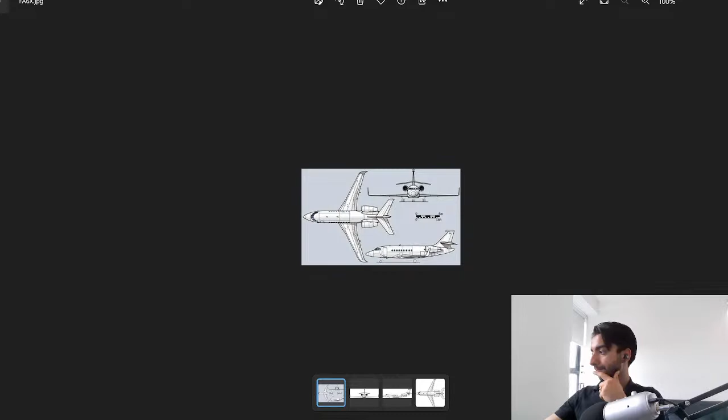Let me just show you what I've prepared so far. The original blueprints look like this, and as you can see, even on my screen it's coming up as a very small picture, so you can imagine what happens when I zoom it in. You can already start to see a lot of blurriness around these lines, and that's not really a problem, but when you put this inside of Fusion, the canvas is going to be somewhat translucent. Even though the picture itself is quite detailed, because the resolution is so low, we are going to struggle a bit. But that's okay.

That's actually why I took these as a challenge. My alternative was to make the Dassault 7X instead, which even had dimensions in the blueprints. That's my backup - in case the blueprints don't match up with the physical dimensions I find online, we'll go ahead and make the slightly bigger version of this aircraft, the Dassault 7X.

I can show you the blueprints I've prepared as well. So that's going to be this one - as you can see, again this is very, very small. If I zoom in, you can see where I've manually cropped this out and put it in place, but the quality is not very good. Next one is the side view - similar situation. And then we have the top view - similar situation.

Now, I have made a similar aircraft in the past, but that was with very nice blueprints - I think it was the Gulfstream. You can actually see that aircraft featured in my videos a lot, in my wallpapers and stuff.

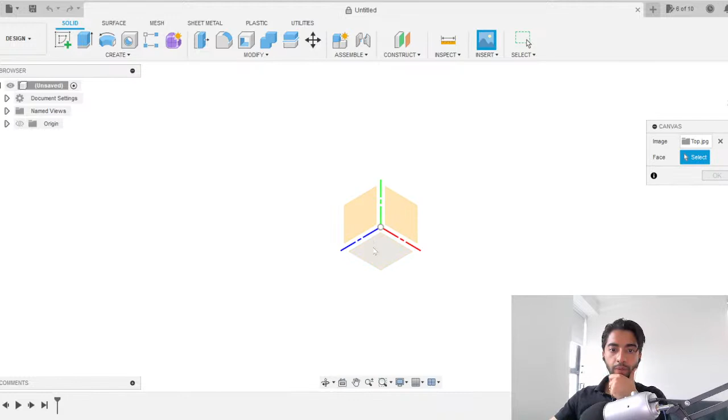Okay, let's take this here - the top view from the top section of Fusion. It seems like it's in the other way, so I'm going to rotate it 180 degrees, and I'm just going to scale it in an arbitrary fashion for the moment.

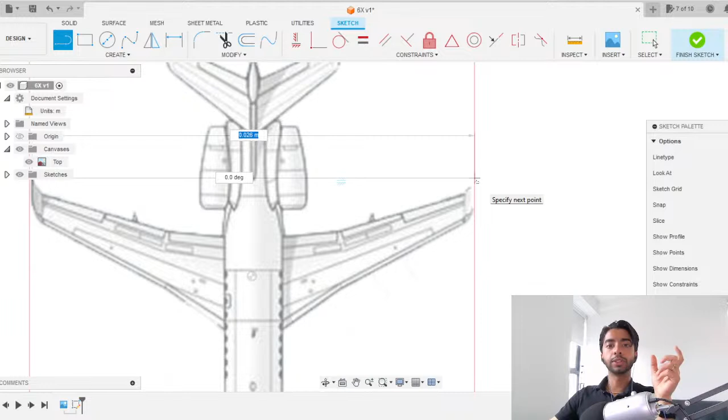And now it's gone down. But let's go to document settings, units, convert that to meters. Now you'll notice it would have converted it. So now hopefully from here to here it would be 25.94 meters. No, it isn't. Okay, so after converting it, you can tell it's converted into meters according to what its millimeter equivalent was. So let's try to scale this up again.

So calibrate from that point to that point, and now this is going to be 2594. So this is going to explode by approximately 1,000 times, because 1,000 millimeters is 1 meter. So 1, 2, 3, go. There we go, it explodes, yep - now that should be in its correct scale. So let's just go ahead and delete that - we don't need that sketch anymore.

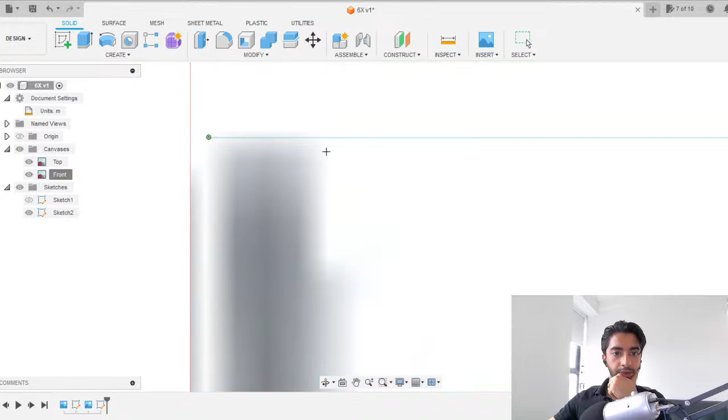We're going again. Paste the same number, and there we go. So as you can see, that's very, very nice. So the top blueprint and the front blueprint are very, very close.

The reason why I'm also happy to take this risk with the blueprints being of such low quality is because remembering the agenda of making this particular aircraft is to 3D print it. So if some of the measurements are a little bit off, I'm more than happy with that, as long as the aircraft ends up looking like the aircraft we're designing.

What will be interesting to see is the aircraft that some of you have recommended, like the FW190D, the Shrike Commander 500S, the F-20 Tiger Shark. Those would be interesting to see, because I don't know if I want to 3D print them, but I'm going to try and put some more effort in those lives to make it as accurate as I can.

In fact, I did work with a gentleman in the United States Air Force who had requested a very particular aircraft from me, which was operating in the 1920s or 30s, and I had to make that to a very high accuracy. So that took me about 20 to 25 hours to make.

Obviously, doing all of that at once in a YouTube live will be difficult, but it'll be interesting to see. And who knows, maybe one day I'll go live for like 48 hours and design the most accurate aircraft I have ever designed, which would be fun.

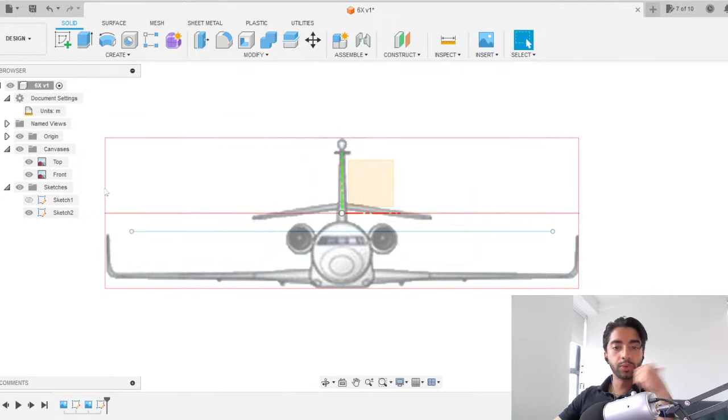Okay, so because we're now in the correct scale, I now want to position the front view correctly as well. So what I'll do is take the nose section as the middle point of the origin. The reason is because in this blueprint, we don't have the wheels.

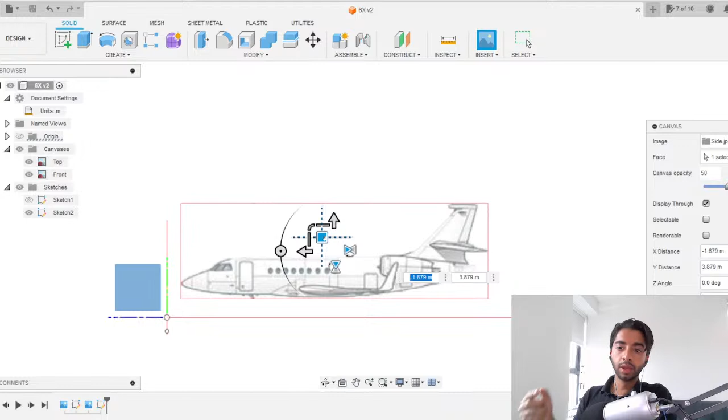So here's an approximate thing. And what I like to do is I like to not try to scale it to its perfect scale right away. I try to make it a little bit smaller than what I'm actually expecting it to be. And then when I calibrate it properly, I hope that everything will just fall into place. So I think I'm happy with the scale for now.

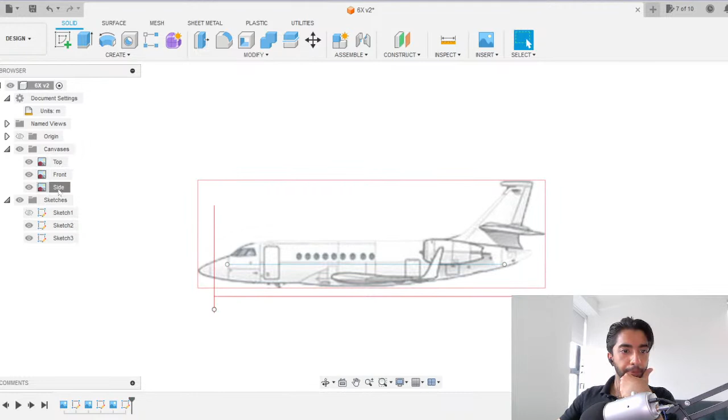And now we're going to position it. And now we can see whether or not that was the correct assumption. So remembering that we decided that the tip of the nose is going to be the center of our origin. So just about there. And now going back, we can see it actually aligns pretty well. I'm kind of surprised. So if we look at it from this view, we can see that when the tip of the nose aligns, then also very, very closely, I think there's just a little gentle nudge there that we might need to do, it aligns with the back. There's another way to verify this, and that is to do the front and the right view, so we can see whether the top of the fuselage, the cylindrical section, aligns well with this or not.

And I think it might be a good idea to scale up the right view just a little bit for them to meet. And that way we can also check then if the height of the fuselage itself matches with the height of the fuselage in the front section. Because remember, the front section was calibrated according to the wingspan of the aircraft. Okay, so I'm just going to edit the canvas. Okay, no, we don't need to calibrate it. We just need to edit the canvas.

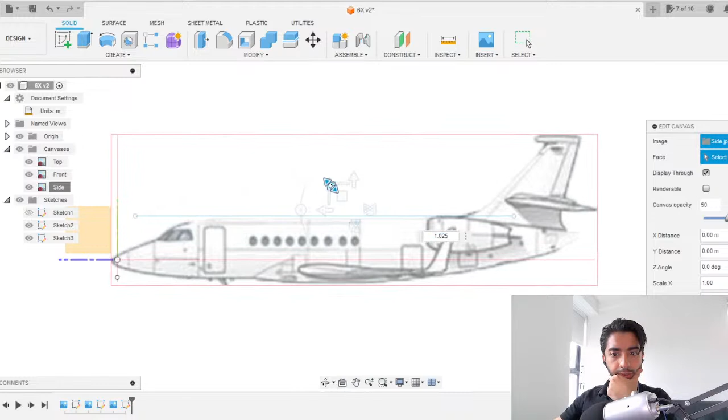There we go. And I will just increase it very slightly. That's too much. So 1.025 is 2.5%. We don't need to do 2.5. Let's do 2%. Nope, let's do 1%. Even 1% is too much. So really, it's a very small amount that we need to do. So 0.5%. And let's try aligning it there. Now you can see the back of the aircraft. The red lines you can see actually match really well, as well as the fronts. But again, we just got to make sure.

So let's remove the origin. And now let's do the top and right view. So now you can see that the tip of the horizontal stabilizer from the side view matches up with the tip of the horizontal stabilizer from the top view. Very, very nice. It's a very satisfying feeling when you just put in a little bit of extra work making sure these things match up. Okay, and now we can also see that the top of the fuselage from the front view is now very closely aligning to the top of the fuselage for the side view, and vice versa for the bottom. And another check I'd like to do is for the wingspan, so front view and top view.

Cool. So I'm happy with that, and it seems like our assumptions were right. So we did the length of the aircraft from the fuselage to the fuselage. Now, one thing I'd like to verify just to be completely sure is the height of the aircraft, which is 7.47. Now, the way I can do that is, let me just start from the side view. So I'm going to go from here, and really I don't need to even draw this line. It's more of just a reference. So let's go ahead and do 7.47.

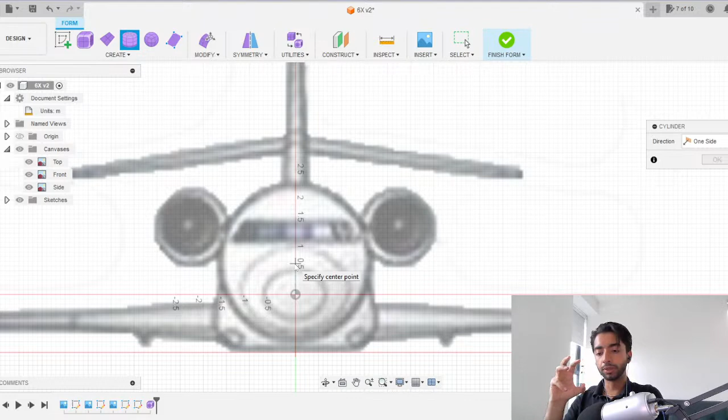So now we can go ahead and get started. Going to go to create form, cylinder, front face. And again, try and approximate where the center of your cylinder would be. So for those of you who are new, the fuselage of an aircraft usually is quite cylindrical in nature, so it might not be a perfect circle, but it is of a circular nature. So what we tend to do is we create a circular cross-section to begin with, and then we maneuver at every section or every segment along the fuselage to adapt to the actual shape of that aircraft.

So I'm just currently looking at an approximate location, which could potentially be the center of the circle I create. So that's that. There we go. And again, similar to the A330 series, we have to decide whether we want to take the outer border as truth or the inner border as truth. And I tend to go with the outer border, so I might do that right now.

Okay, so that's good. And let's go to the side view. That looks good as well. Again, we do want symmetry in this case. So I'm going to select symmetry and I'm going to do length symmetry. No, that's not the one. Width symmetry. So that's the one, of course. So as you can see, the green lines that have been highlighted are where your plane of symmetry is going to be. Okay, so I'm going to go ahead and press OK.

I'm just going to pull this entire thing back. And you can see that because our blueprints were well aligned, approximately this already matches the side view of the fuselage. We just have to scale it down ever so slightly, which is very, very okay to do. So I'm going to go ahead and press OK and save.

Again, front view, you can see that even though I selected that as the top, this is coming down a little bit. So we have to move the entire thing a little bit up. And let's see how this reacts. Okay, and now what I want to do is start scaling this down. So I'm going to remove these sections and I'm just going to start with a single slice. So we take that, right click, edit form, and now this becomes completely maneuverable to our control. So I'm going to scale this down just slightly so it matches, and I'm going to press OK.

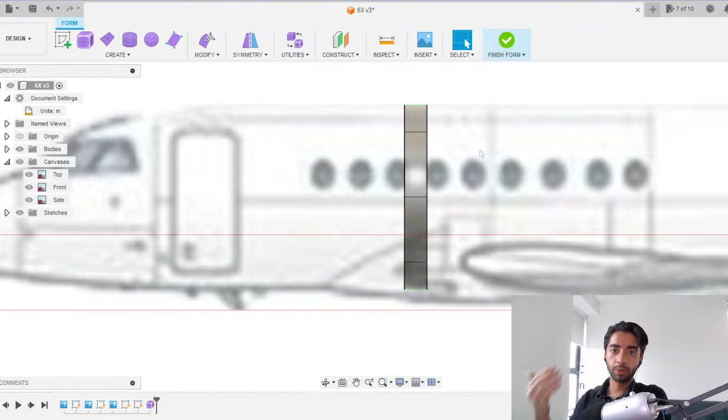Now at this point I have to decide which two blueprints out of the three do I want to take as my perfect reference. What can happen often in setups like this, where we only really spent a couple of minutes setting up the blueprints and it still managed to do a very, very good job. But if you want things to be absolutely perfect, you need to take a little bit more care. And in instances like this, your three blueprints won't align perfectly, as you saw with the height reference that we tried to verify with.

So in cases like this, what I like to do is mostly take my side view and my top view as my absolute reference points. Okay, so this means that I will try my best to satisfy all three views, but primarily I'll be focusing on my side view and the top view, again, depending on which component of the aircraft I'm working on. So for the fuselage, I'm going to be looking at the top view as well as the side view.

So let's get going. Double click on the edges, right click, edit form. Again, I'm just going to press Alt on my keyboard because I'm on Windows, and I'm going to just extrude this back a little bit.

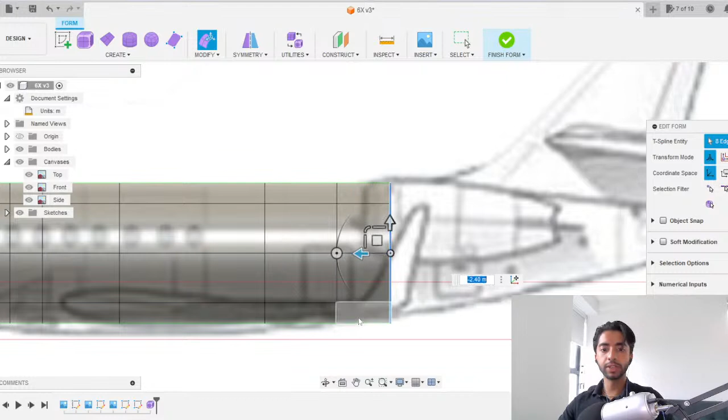Okay, very nice. So let's finish the back section of the aircraft. Alt, move, so I think we're still okay there, and we're still okay there. A little bit more. So now you can see, as this starts to curve up, we need to start scaling this down in 2 dimensions. And if you're a little bit confused as to what I'm saying with respect to the views and the dimensions and the scaling, do watch my complete tutorial series on this. I go into this stuff in a lot of detail.

So now what can look confusing for the back of this aircraft is this section over here. And it can look confusing, but it doesn't have to be. And the way I would look at something like this is, obviously I'm going to bring up some reference pictures to verify and confirm, but the way I would model this is to gradually taper this backwards, as I would for a normal airliner as well. And just think of these engines as your external engines.

So you'd model the engines as a separate entity. I've seen some people try to model everything in the same form, and I think that can get very, very tricky. I personally don't like to do that. I like to make all my components separately and then join them later on.

So if you remember in the A330, what we did was we made the complete fuselage, we made the complete wings, the engines were separate components, and the pylons that attached the engine to the wing were also a separate component. So they were not all attached to each other. They were separate components, which then got assembled.

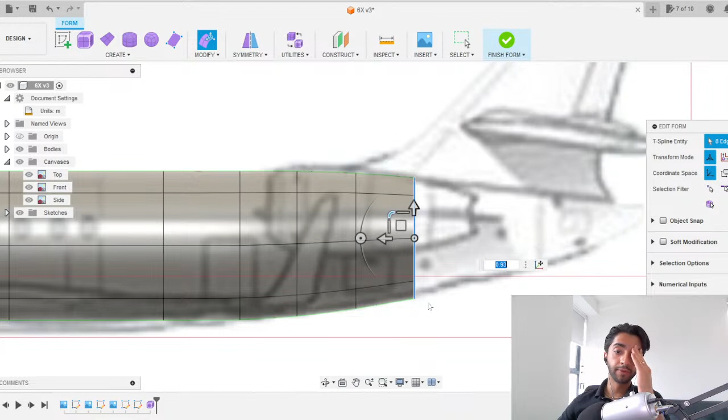Again, remembering that when we're dealing with 2 dimensions, we're looking at the top and the side at the same time. So every time I do an extrusion and I scale something, I want to ensure that it's scaling uniformly in both the dimensions. A mistake I often made when I was coming up with this flow, which was a couple of years ago, is that I would often try and scale everything in 3 dimensions at the same time. And you can do that with this little section here. But that actually messes up things quite significantly if you don't know how much you want to scale everything with.

So just to give you an example, what that would look like here is this. So you can see that entire thing is going up and down in 3 dimensions. And it kind of looks like the afterburner of a military jet. I think it looks really, really cool, but it's not useful in this case. You do not want to be maneuvering stuff in 3 dimensions all at once. So 2 dimensions at a time is good.

So when we're dealing with the side view and then we scale it down like this, we're dealing with 2 different views at the same time rather than all 3 at the same time. And then when we do it from the top view, we're dealing with the top and another view at the same time. So just because you have the ability doesn't mean you need to make complex things too complicated. Okay, Alt and drag.

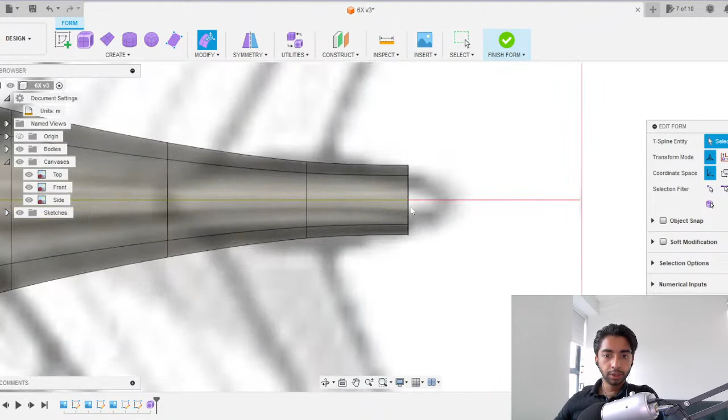So let's try and do that. And now, if I just rotate and see what this might actually look like. So I'm going to switch off the canvas. Honestly, that actually looks pretty good from the back and from the side. But I think something about this tells me that I need to make this a little bit more gradual. It feels like it's coming in as a convex and then all of a sudden turns into a concave. And we don't really want that to happen.

So I'm just going to edit the form. Now in this case, we've got to be very, very gentle with how we taper this, because if we're not careful, it ends up looking really, really strange. I think that looks a little better. So let's have a look. Let's switch the canvas off. So side view is correct, we know for a fact. Top view also looks decent now, and back view still looks decent. Okay, I think I like that, so I'm going to go ahead and press OK.

Right, canvas on, and we can now continue with the front view. So, sorry, the front section from the right view. Okay, so we're now going to start extruding this bit by bit, and we're going to follow the same procedure as we did for the back.

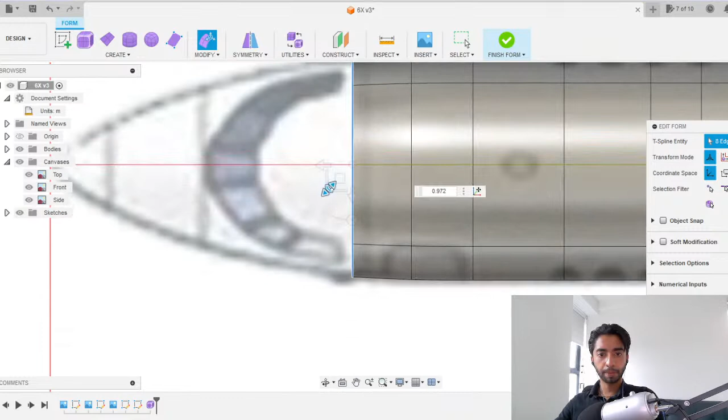And honestly, at this point, I've made so many different models, but every single time I have to remind myself to take it slow, especially at this stage, because whether we see it intuitively or not, our eyes and our minds do pick up on these subtleties, which make the aircraft look like the aircraft that we're about to make. So it's always good to invest some time making sure these features are correct.

In fact, something similar is happening with the car series that I'm currently recording. It's on YouTube as well. So in those video series, we're making a Mercedes S-Class. But at the current stage of where we are, it could be literally any car. And in the last video that I uploaded, you could potentially even mistake it to be a BMW because of the way we've shaped it at the moment. So these things can be very, very subtle, but then again, they decide what the end product looks like. So just reinstating that it's always good to watch out for these subtleties.

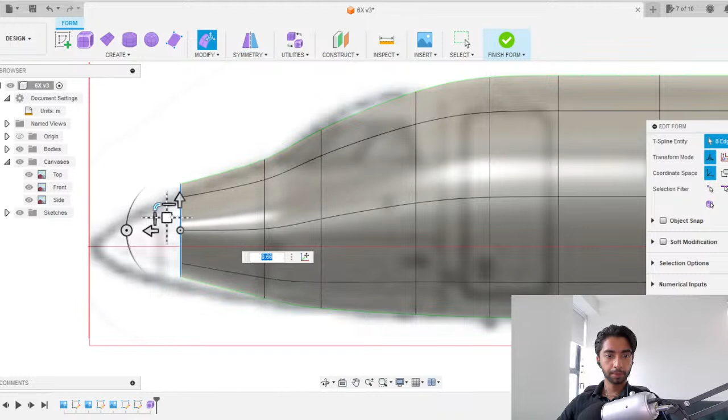Okay, so I think I might want to make this a little bit smaller or bring it down a bit more. So either we do that or we patch it up at that section and then we loft the rest of it. So let's see how this would look if we just continued. I have a feeling it's going to look a bit strange. So let's stop it there.

Let's turn the canvas off. So you can see that it is evident that there is a turning point here that's sort of going from one gradual gradient to another. But I don't think it's as defining as I'd like it to be. So we hide the bodies. We can see that it kind of comes to a stopping point somewhere there. I believe there is a way around this. So let me just undo to the point we went there.

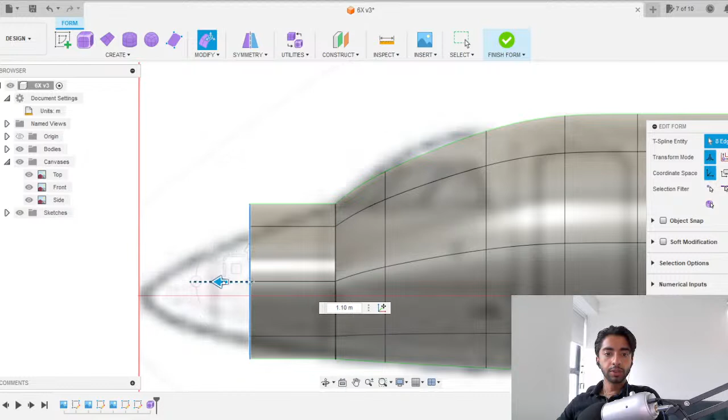But if I undo that and I press Control Alt and I drag, you can see that it doesn't care about continuity. It will literally just extrude it in that particular direction. So I'm actually going to just try that out. I'm genuinely not sure how this is going to end up looking, but let's have a look. And now I can just go ahead and do Alt, which is our continuity extrusions. And I think I've forgotten to actually edit this bit, so we need to do that as well.

Okay, let's finish the form and have a look at how this looks now. So canvases hide... that is starting to look like a duck, which is not very nice, but hopefully when we make the nose, it will start looking more like the aircraft we're actually trying to make.

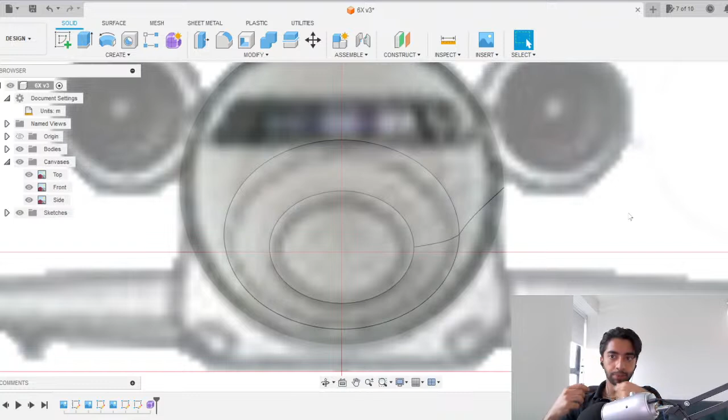So if 2 out of 3 things match, the third thing you'd hope also matches, especially when you've maneuvered it in 2 dimensions at a time from the front, side view and top view. Hopefully that makes sense. Let me know if it doesn't and you'd like me to explain it a bit more.

Okay, so let's go ahead and patch up this body. You can see that currently this is a surface, it's orange, and what we'll do is patch it. So let's go to surface, use the patch tool, patch that. And now I also want to patch the front section.

If I hide the canvas, what you'll now notice is that there are 3 bodies, which are 3 surfaces. We can now stitch these surfaces together because essentially when we created this cylinder, it was hollow. It's just a thin wall with no thickness to it, so it's just a surface.

To turn this into an actual solid body, we need to either cap the 2 ends to make it a solid body—it's just giving me an error, sorry—or we take the surface as it is and then apply the thicken tool to it.

But obviously in this case, we want to solidify the whole thing. So I'm going to press 1, 2, and 3 and press OK. Now you'll see the 3 surfaces will go away and it'll be turned into 1 body.

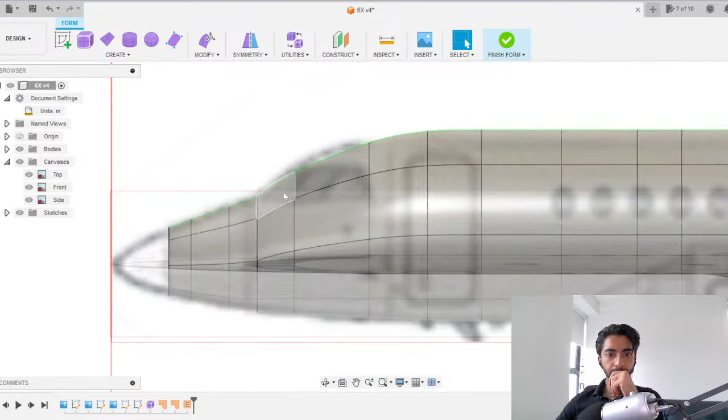Okay, that looks a little better. And if we're still not happy with it towards the end, then we can come back and change it a bit more.

Okay, so I'm going to create a sketch on the back surface that we just created. This is because I want to split this very back section into two symmetrical halves. I'm going to press P on my keyboard to project, click on specified entities, press that one, press OK, then L on my keyboard to draw a line.

And guys, all of this is covered in the tutorial series, so really I'm just doing the same stuff that I did there, but in a slightly different model. If I come across anything that's more interesting, I'll make sure I mention it. But I'll talk out loud just to make sure people are following.

Okay, now I want to project this bit here. I want to project the body. And I'm now going to create a control point spline, so just something like that. Again, if you have any experience with splines in Fusion, you know that Fusion tends to crash when working with splines.

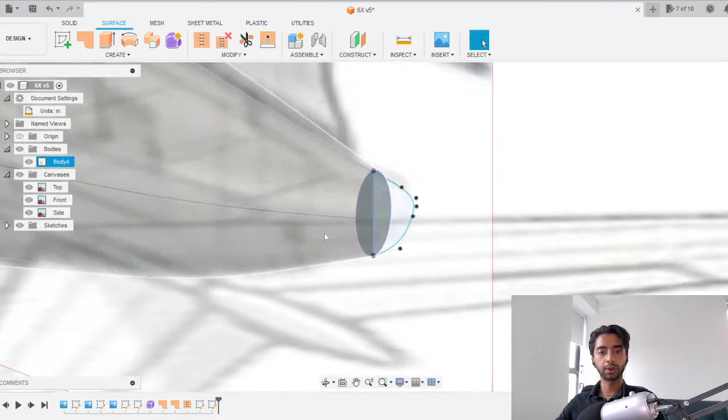So create, loft, 1, 2, nope. So it's 1, 2, and 3. Let's cross our fingers and pray that it will work. 1, 2, 3. Wonderful. Again, this is usually where a lot of people's problems come in using this lofting section.

Because either the proportions are completely out of place or there's not enough geometry to wrap into a loft, so we really got to play around with the sketches, make sure one thing is not extra long and completely disproportionate to the other sections that we're trying to loft.

Okay, now I'm going to repeat the same thing for the front section, and I can see that there might be a problem lofting this front section, and if there is, then we'll solve it together. So project, specified entities, the front section, symmetrical.

And now let's turn it into two symmetrical halves. Create sketch on the left plane, project your main body, canvas on, and now we're going to try and follow that path over there. So create spline, control point spline. Of course, you can use any kind of splines you want. I think in this particular case, you could even use a conic curve, but I'm going to spare myself the trouble there.

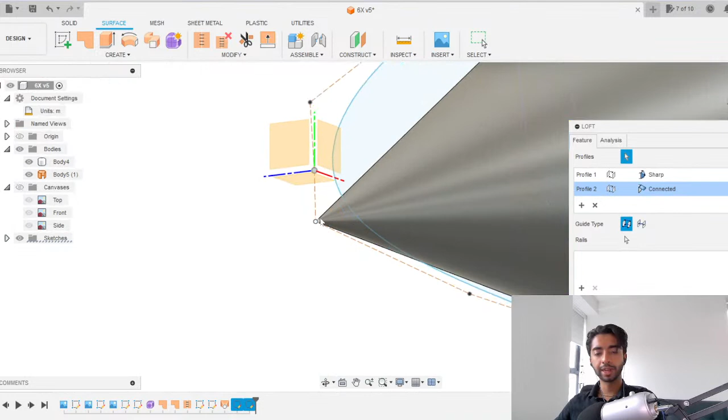Cool, now let's try and loft that as well. So 1, nope. And you can see sometimes we may not realize, but we would have selected something and tried to loft a whole surface with a point. And believe it or not, it's actually possible. So if I were making a MiG-21, for example, I would have done something like that. But in this case, it's wrong, so we shouldn't do that.

So make sure nothing is selected. Make sure you press escape to ensure that nothing is selected. Create loft 1, 2, and 3. Okay, so in this case, it actually worked pretty fine as well. Excuse me.

Okay, how are we doing? Sometimes I forget I'm live, which can be fun.

Okay, so I know that from this section, it looks a bit strange, but again, I'm hoping that as we move forward and start adding more details to it, it's going to start looking like our actual aircraft. So I'm going to go ahead, press save. Cool, now the next thing we want to do is make the wings.

So let's have a look at the wings from the side, from the front view. And we can notice right away that the wings are actually just completely straight. There's no dihedral, no anhedral. What is interesting to note is that your horizontal stabilizers have an anhedral. So if you don't know what an anhedral or dihedral is, when your wings or your surface is inclined to your fuselage, there's an upward angle for dihedral, and your anhedral is downwards. And these angles help in stabilizing or destabilizing an aircraft.

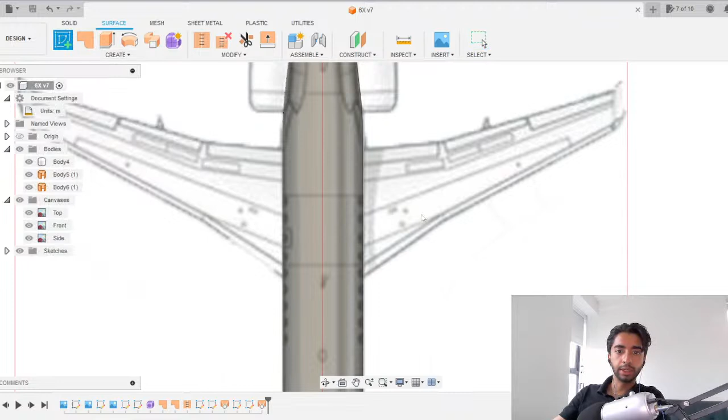But in this particular aircraft, the wings seem to be completely straight. So what we'll do is we'll go to the top view, and we're going to try and trace out where our airfoil chord line would be. So I'm going to create a sketch from the top.

I'm going to do a line from here to here, from here to here. Okay, cool, so we can trim that away and that away. Sorry, we need to trim that away. Now we can trim that and that away. Trim, trim, trim. And now we have this line over here. So that line can tell us how big our chord line should be. So let's finish the sketch there.

And it seems like we need our airfoil section to be starting from a lower height, but that's completely okay. So what we can do is... I don't know if you can hear a baby crying. Okay, that's a bit funny.

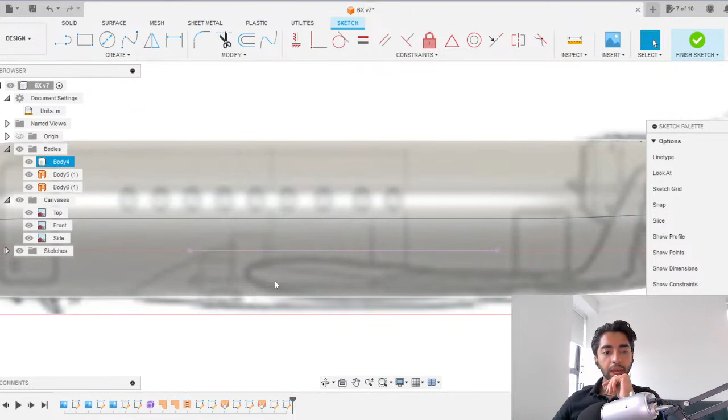What I want to do is project this line over here that we just created. The airfoil section needs to be a bit lower, as we said. Because this is for 3D printing, I think it would not be good to use the actual airfoil that this aircraft uses, but I'm going to come up with an arbitrary wing airfoil shape. I'm going to make it quite thick, because when we 3D print this at a miniature scale, the thickness of the wing really matters.

Your 3D printer nozzle has a fixed thickness, and if the wings are too thin, it will literally not print the wing. I've experienced this a couple of times with Ikram, if he's still in the chat, I'm sure he'll be able to tell you. So we're going to try and come up with an arbitrary airfoil shape in this case as well, and then we're going to try and make it a bit thick.

So create spline. Actually, before I do that, I'm just going to create a construction line down a little bit, so somewhere there. And now I'm going to create a normal airfoil, so spline, control point spline, again trying to be extremely as thick as possible.

And then I can just go ahead and mirror this, so mirror line, finish the sketch. It seems like because of how thick we've made it, the wing's actually coming out of the fuselage. But that's actually okay because we still have the wing box that we need to eventually create.

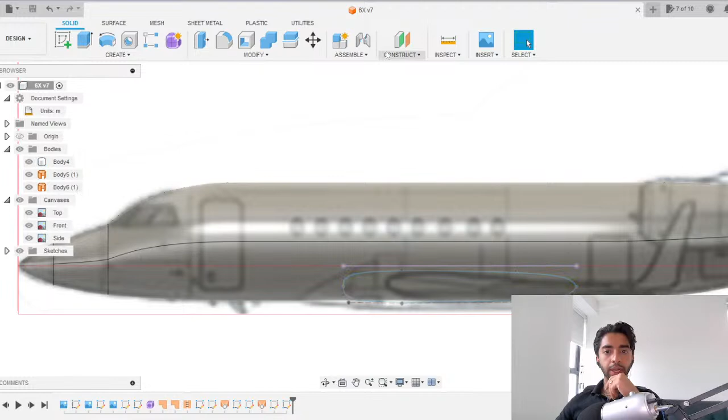And we have our chord line ready. I'm going to construct a plane at an angle and use that chord line. In this case, it's completely 0 degrees, so we don't need to create any sort of anhedral or dihedral.

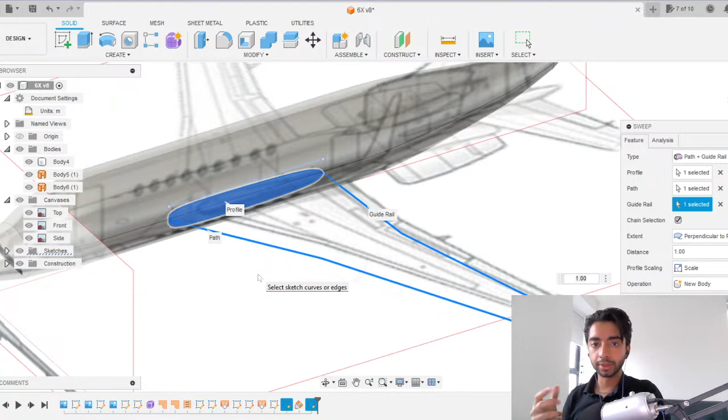Okay, so this makes sense, and the reason is because the primary path that the sweep is meant to rely on is not smooth. As you remember, we just created this sharp line here, and then we created another sharp line, and there's no smoothness between it. It's sort of like if you zoom in, it's going to be like this, and a path cannot be created based off that. If there's a guide rail that has a sharp edge, that's completely fine.

So I'm going to cancel this, and I'm going to go back and try and edit this one. I'm going to try and edit the sketch here. In this case, it's actually a really easy fix. We can quite simply just create a fillet over there, which is going to be a very gradual, smooth edge there.

What that will allow is that line and that line now have an intermediary line, which both of them are connected to using tangents. Now, because of that, we're hoping, fingers crossed, that the whole wing is now going to be smooth. So let's finish the sketch and try and sweep that again.

So sweep, guide rail, path is here, guide rail is here. Okay, perfect. And again, it's showing us red initially because we're sweeping from the plane of symmetry and the fuselage exists just outside it as well. So by default, it's trying to cut through, but what we'd want to do is actually new body. Okay, and we can go ahead and press OK.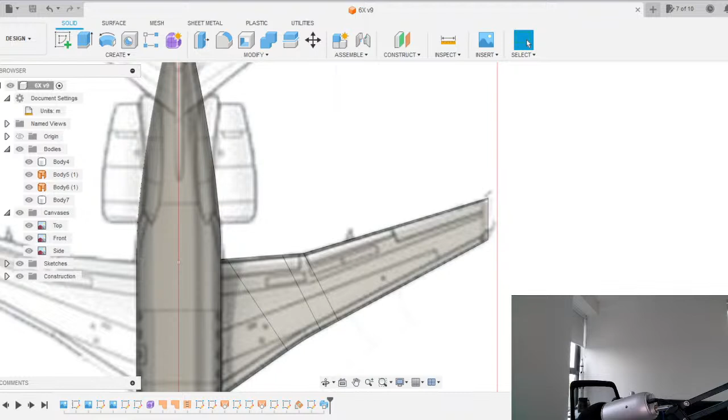and I'm just going to take a 1-minute break, and I will see you guys in a minute. Mic test. So I'm back. I just had to use the washroom for a bit. If you can hear me, please let me know in the comments, because I muted and then I unmuted my mic. So if you can hear me, please let me know. I'm going to assume everything is okay, and I'm going to continue.

Okay, so we just created the wing, and let's switch off the canvas and see how that looks. Okay, that's good. I think what I want to do now is perhaps it'd be a good idea to create the empennage sections. So the first thing we need to do in this case is we can't actually make the horizontal stabilizers before we make the vertical stabilizer. So what I'll do is I'll create an approximate vertical stabilizer, again using an approximate airfoil section, and we're going to sweep it up like we just did for the wing, and then once that body is created, we can then go ahead and create the horizontal stabilizers. Okay, so let's do that.

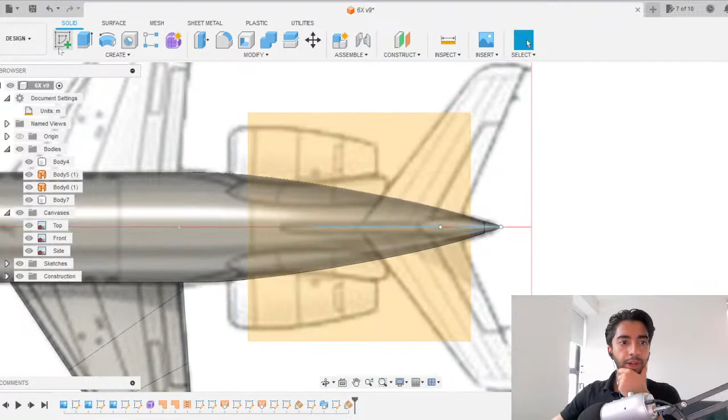Might be a good idea to project our line. Where is that line gone? So if you can't find the line, there it is. I just switched off the visibility for the body so I could find the line again. There we are. Press OK. Okay, spline, control point spline. Again, just making it as thick as I can. Okay, come down. And you'll see why, because when we scale this down, hopefully in the next hour, we'll be able to see why it was necessary.

So create a sweep, path and guide rail. So path is smooth, guide rail is also smooth. So there shouldn't really be a problem. So the profile is going to be this one and this one. Okay, there we go. And we need it to be full extents, and we need it to be a new body. There we go. Let's hide the canvas. Okay, that's coming together well. Let's bring back the canvas.

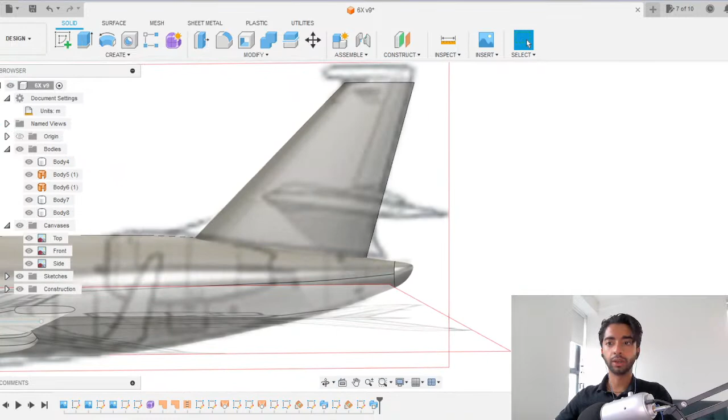And what I would like to do is, as a defining feature of this aircraft, I would like to actually create this little section over here. So let's go to Google and see what this section looks like. Okay, so it's really just another aerodynamic surface on the top of that. So I think we can go ahead and create that. It shouldn't be too complex. I think what I'm planning to do is first create a patch on the top, and then perhaps offset, make a line, and then create a sketch, and that will revolve around its own axis. So let's see if we can do that.

But before we jump to that, I want to create the horizontal stabilizers, and that can be done on this plane. So what we can do, because remembering we actually need to create an anhedral. So what I'll do first is, from the top view, I'll create a reference path just to try and locate where our airfoil will actually be placed at the center if it were to be projected in this sweep. Okay, and then I'm going to go back to my reference, which is here. Sorry, my plane of symmetry, which is here.

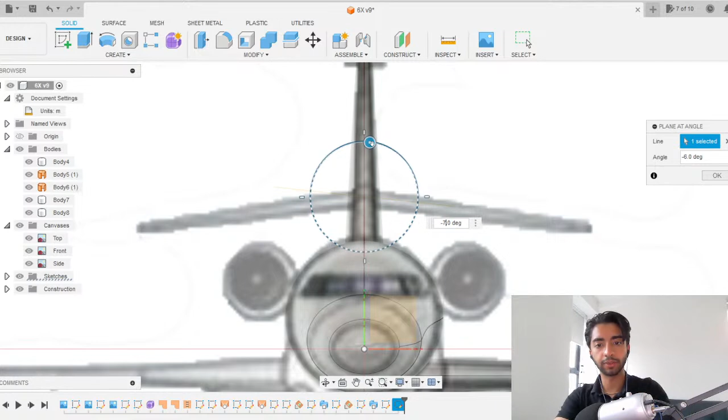And let's try and put it down by 5 degrees. And once we sweep it, we'll understand whether 5 degrees was a good idea or not. In general, I just try to do 5, 6, or 7. I think 7 is looking more promising. So I'm going to do 7 degrees. And now I'm going to create a new sketch.

Actually, before we do that, we can actually edit the sketch and create the airfoil here itself. So we don't need this line or this line or this line. And again, I'm just going to create an arbitrary airfoil section, and I'm going to make it as thick as I can, but again, relying mostly on the thickness in the front to make it look like an airfoil. So then we're going to mirror this and finish the sketch.

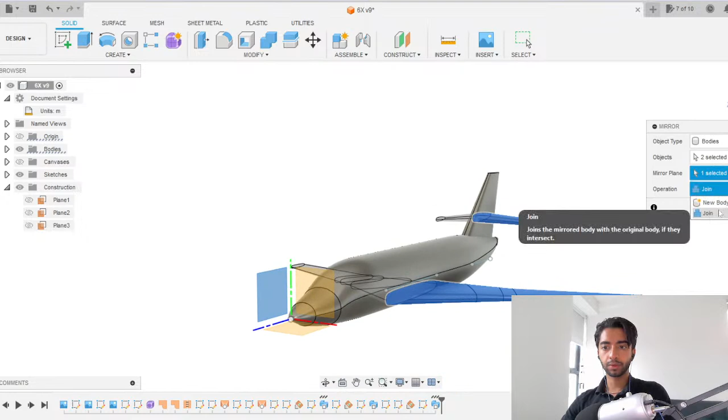There we go. Apart from the engines and stuff, we pretty much have the main components of this aircraft ready. And if I were to put it into perspective and mirror these bodies, you can see that's already starting to look like a private jet.

And it's interesting because there's still no detailed defining features of this particular aircraft, but just by the sort of proportion of the wingspan and the fuselage length and the height and the configuration of the wings and the tail, you can already tell it's a private jet. That's very, very interesting.

For those of you who've done aeronautical engineering and have designed aircraft in the past, I may be completely wrong, it's been 2 years since I graduated. But usually for different specifications of aircraft or your different mission profiles and the different type of customers you have, there'll already be somewhat of a set idea of what your aircraft is going to end up looking like, unless you're going for something completely extraordinary, which has never been done before, which is also very, very cool.

Okay, let's get back into making some more defining features. So I'm just going to undo the mirror. Orthographic. Now, at this point, there are two things we can do. We can either create the wingtips or the horizontal stabilizers ends or the vertical stabilizers ends, or we could go ahead and create the engine section. So continuing with the theme of creating the major components first and then adding features later, let's actually make the engine first. So I'm going to switch the canvas back on, and we know the approximate location of the engine is over here.

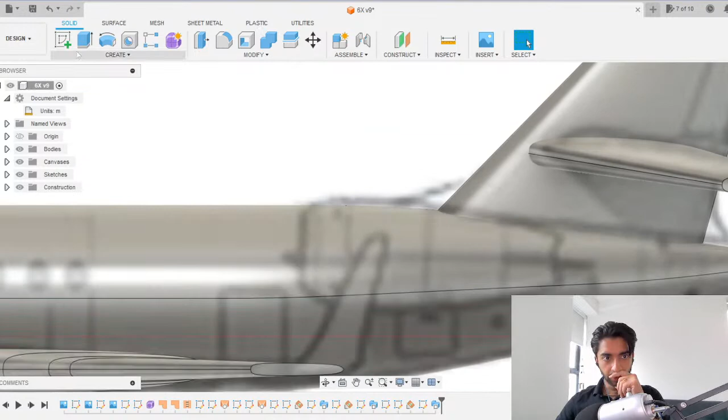So what I need to do is, from the side, the first thing I want to check is the engine inclined? Because if you've done propulsion or any sort of engine design, you'll know that there's also some sort of an inclination that engines can have with respect to the horizontal. So I'll approximately just take a straight line, and you can see that in this case the engine has a little bit of an incline.

So if I draw a straight line that is horizontal from the center of the engine from the front, and I drag it backwards, you'll see that it's not actually meeting the center of the engine over here. In fact, let's see what angle this is. Where is the angle?

Okay, interesting. I don't know what angle that is. Let's try and inspect between. Okay, it's about 3 degrees. This may not seem significant, but it makes a massive difference when it comes to doing the thermodynamics behind engine design and the overall performance of the aircraft. Okay.

The question that's running in my mind right now is, should we take it the easy way and just make it normal, or should we make it inclined? You know what? Let's do it a bit challenging. Let's keep the incline. So since we already created the reference line for the incline, I'll keep that as it is.

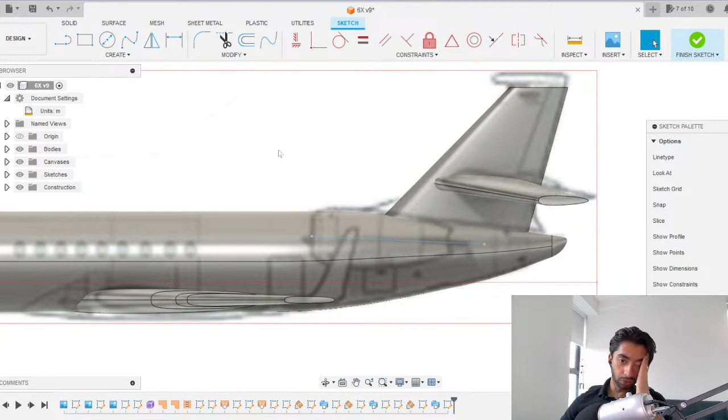I can actually use this line, even though it's already in the plane of symmetry, to create the engine and then move the actual engine component into position. Or we finish the sketch here, and let's do this the proper way. Let's create an offset plane from the plane of symmetry, and drag this so we have an approximate location over here. So 230 doesn't work, 225. Oh, there we go. Perfect.

And on this plane that we've just created, I will project this. We don't need to create any planes at an angle at this point, because it doesn't have any anhedral or dihedral, but it does have an incline here, which we've already taken into account. So let's create a line, and it doesn't need to be vertical up, it needs to be perpendicular to this line. That's what that square 90-degree angle is showing.

So let's do that. And then I'm going to create a spline from here, here, here. Save, because we're using splines. And again, just perpendicular. Okay, perfect. Let's bring this down a bit. As it is, we could sweep this away, but we need this to be a bit hollow if we want to print out the fan.

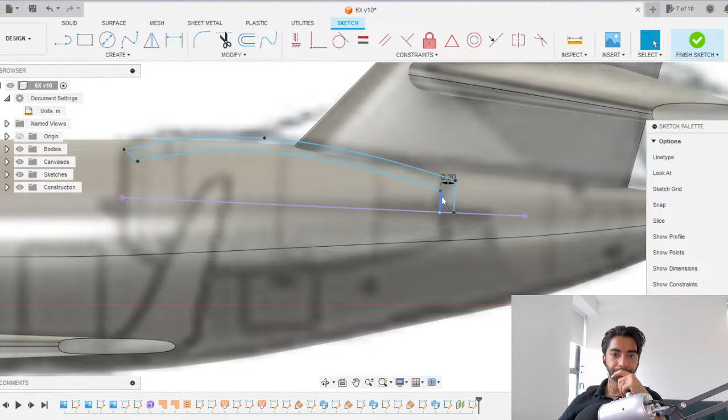So I will create an offset for this. We can make it maybe 0.2 meters. Something like that is nice. And obviously, once we scale it down, if we need to increase it, we absolutely can. Okay, that's perfect. This is now a surface which can revolve around its own axis. Cool, so let's finish the sketch. Create, revolve, use that. Axis is this one. And we're going to do new body.

Now, it's interesting, if you noticed, it was asking us to be able to cut into something. And you can see there's actually a bit of interference between this one and this one. I believe there is a tool we can... Yeah. You can see that red highlighted area there means that these two bodies are clashing. And that should never happen.

So my assumption here is that in reality, remember that when we created the fuselage, we tapered the back of it very nicely back into its position. But it's also possible, if you see that line there, that there was an abrupt change in the width of the fuselage, and then it gradually tapered back down. And that abrupt change would have been where this engine currently is.

So if you follow my mouse, it would have been something like curve in, and then it goes back like that. So if we wanted to, we can actually try and do that now. Because if we go back and edit the form, you'll see we still have that projection of our engine. If it doesn't look good, we don't necessarily have to do it again, because this is for 3D printing. But just as an experiment, I want to see what would happen.

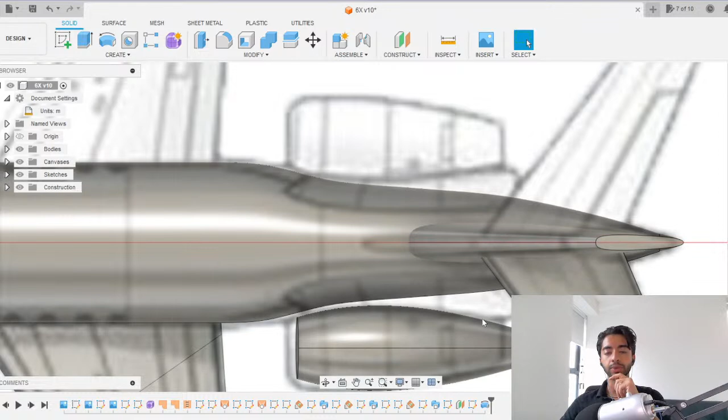So let's keep it like that for now. If we don't like it, we can just undo it. But in order to see whether it even makes sense, we need to make this pylon between the engine and the fuselage. So just making sure people are okay.

Cool. Yeah, so now let's go ahead and create the pylon. And the pylon can be made in a similar fashion to the wings and the empennage sections that we've already created.

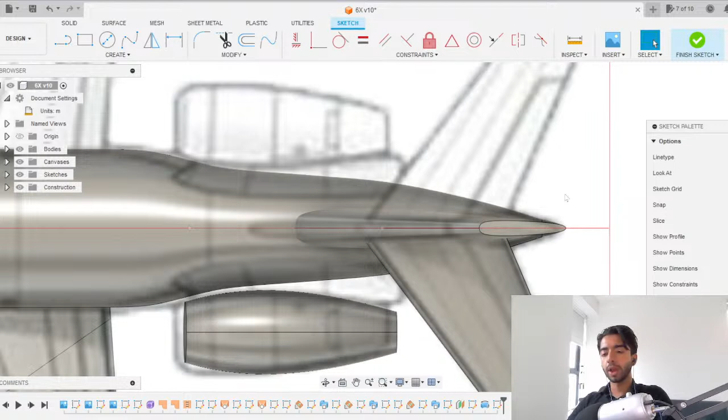But if you then look at what kind of files Blender can accept, mostly all 3D softwares can accept STL files. I think OBJ is another common one. FBX is a common one. So have a look at what Blender can accept, and I'm sure you'll find a way to export something from Fusion to Blender.

Okay, so let's do that. Bring it up a bit. And if we wanted to, in this case, we could also add an incline to this particular line as well. So maybe somewhere there. Let's create our streamline body, which is going to be a thick airfoil. So something like that. Mirror it.

So fun fact, most wings are not symmetrical. So you see that I created this top section here and then I mirrored it down, but most wings aren't like that. Your vertical stabilizers and your horizontal stabilizers, I think most probably are.

Okay, so let's finish our sketch there. And let's add a plane at angle from here. And let's see if we can spot, it doesn't look like there's much inclination from this view. The only inclination for the engine is from this view, which we've already taken into account. So let's do OK there. We need to create a new sketch on there. So we'll now project this one.

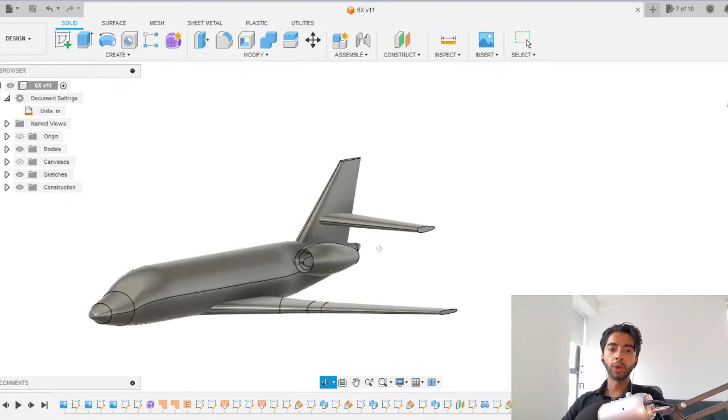Okay, so at this point, I can say that majority of our components are done. We haven't yet made the wing box, but as it is, if you wanted to 3D print this or create some sort of design of this, you already can. But what I'll do now is I'll start working on adding some details, and then we can add the wing box after. So I think the simplest thing to do would be to close this one over here.

And the way to do that in a simple manner, and this would only work if your airfoil was symmetrical, is to create a revolve. So now this and this are split. Finish the sketch. Not sweep, sorry. Revolve from here, and the axis would be this one. And new body, there we go. It's that simple.

Obviously, it's not the best rendering. You can see that it's coming down a bit and then it sort of bulges as a vertical thing. But again, for 3D printing purposes and for the size I'm making it, I'm completely fine with this. But a little bit more detail needs to go into the vertical stabilizer.

So as we said, we wanted to create somewhat of a bulge. If we look a bit closer, it really does look like half of an airfoil that has been revolved 360 degrees, similar to what we've just done for the tip of this. However, it seems like it was done in a slightly different manner.

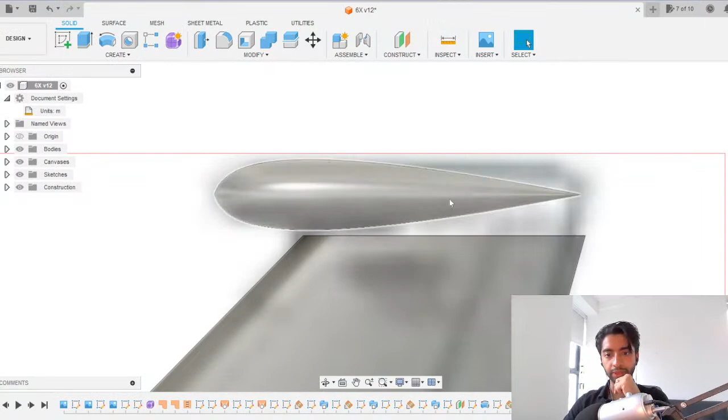It feels like that. So what I'll do is I might just be able to press pull this a little bit above till it reaches that point. So I think that actually looks very, very close to what we're looking for. So I'll end it there, but we'll edit this sketch so it looks a little bit more like what we want it to be.

So maybe we need to add another point of the spline in here. So let's create a new point somewhere here. Let's see if we can maneuver this. No, we can't. So I'll just have to cancel that. Not a problem. We just have to create a few extra points. So 1, 2, 3, and 4. That's what I want to do. That already looks pretty smooth. I'm going to finish the sketch, and there we go. Okay.

To make it a little bit better, what I might do is put this back a little bit. So we're going to try and estimate where this is going to come up, and it's going to be somewhere here. So I might just do that. Finish sketch. Oh, very, very close. Okay, we can now try and press pull this up a little bit more to see how it looks.

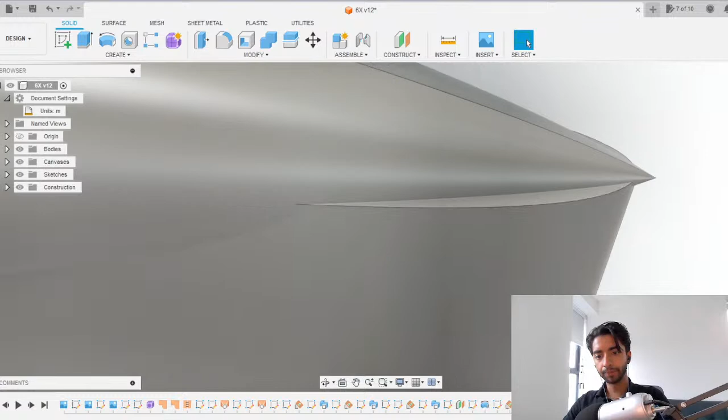And now, because you can see there's a bit of a split there, what I might do is project this back parallelly. So make this line parallel to this line. And now you can see this is actually where it's meant to come. So I might snap that into place. And now finish sketch. And now you can see it's very, very close. Now the only thing we need to do is drag this one a little bit more up.

So not 0.3, not 0.25. Let's try 0.275. Nope. Okay, 0.28, 0.285. Perfect. There we go. Look at that. So let's save that. And again, we could have done something even smarter, to make it more accurate, and we could have lofted half of the surface to the tail. But when we shrink this down, you won't be able to tell the difference at all. So I'm happy with this.

Let's close our canvas. That's starting to look pretty decent. So we got that covered and that covered. Now that I remember, these are still surfaces, so we need to patch them and turn them into solids. So let's do that before we forget. Okay, now that is a solid. Patch that one, press OK, stitch that one, and that one. Cool.

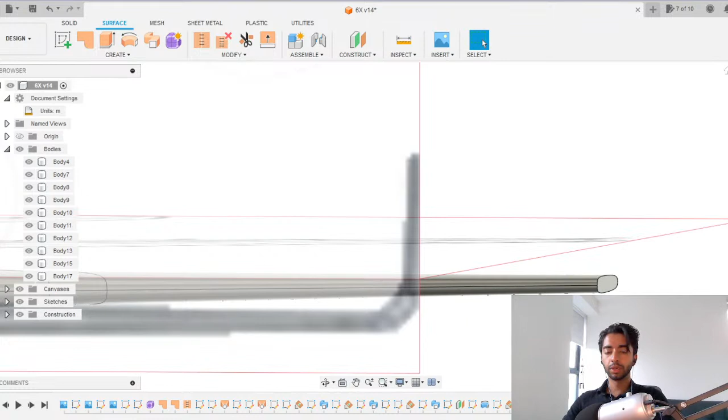Cool, so now let's do the wingtip canvas. And the wingtip's going to be interesting because it is quite literally 90 degrees up. So, similar to what we've done before, we could just create a 3D spline and have that follow that. But if I remember correctly, it is going backwards as well. Yeah. So we can't just do it as simply as that.

Let's then create a 3D sketch. So create a sketch on the tip of that. Let's bring back our chord line, which we will refer everything towards. Right. 3D sketch, spline, and we're gonna go from that side there to somewhere there, and then we're gonna move this a bit to the side.

And we need to now activate tangent, make sure that's actually vertical, and activate tangent there. And I don't want to enforce horizontal here, but I'm going to try and approximate it just very quickly. There we go. Now if we go to the back, we need this to now come somewhere there.

And now I can no longer have this vertical constraint here, because if I try to move this, it won't let me. So sometimes what I do is I add the vertical constraint just so it becomes vertical in one dimension, and then I remove the vertical constraint, and then I can maneuver it freely as I like.

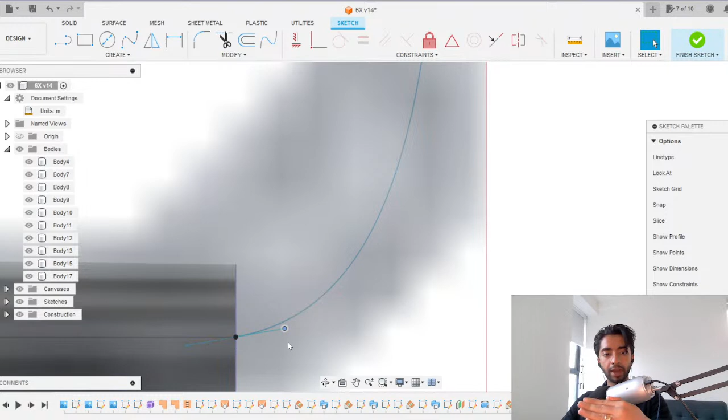As for this one, we can see that from this angle we have a slight angle for that tangent. But from this view, if we pull it sideways, it won't affect how it looks from the front. Remember how it looks from the front? It's sort of inclined in this way. Now if I pull it back, nothing should actually happen from the front view. There we go, absolutely nothing's happened. This is because we didn't move it up and down, we moved it sideways, and from this view sideways is in and out. So absolutely nothing happened from the front view.

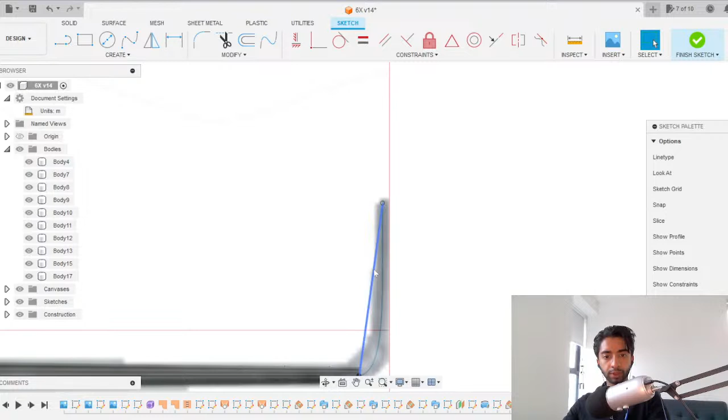And once again, take that, turn it vertical temporarily, and take this one, activate tangent handle, move it down. Because from this particular view, it seems like they both want to go in the same direction. But from here, we need to change this so we can do in and outs. So, of course, we need to delete that constraint we added temporarily. We can now do that, but we can't do it too much because it'll come up with that interesting curve. But we can do this.

So let's press OK, and let's try sweeping this now. Sweep. Profile is this and this. Path is this. Guide rail is this. There we go. Press new body. That's your wingtip for you.

Let's hide the canvases and look at that. That's starting to look really, really nice now. To make it look even better, we can do perspective, mirror this, and that. Mirror plane is this one. That's starting to really come together. I'm actually quite happy with that, even though we've still not added too much detail. So this now looks like a generic private jet.

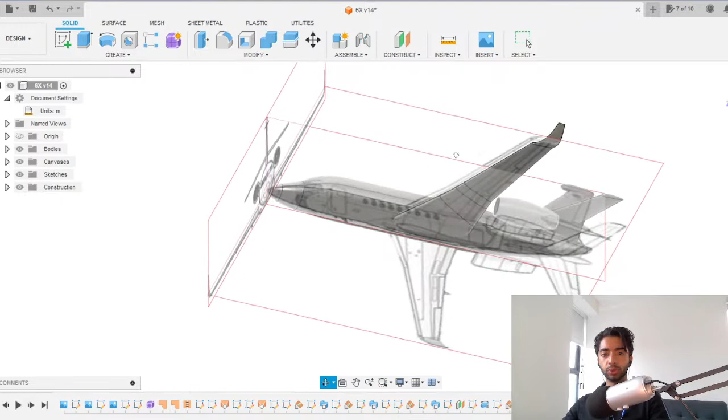But now we're going to make it look like the Dassault 6X. Cool, so let's continue. I'm just going to undo the mirror, come back to orthographic, make sure we can do some more stuff. Okay, so we've covered the wingtip, we've covered the tip of the vertical stabilizer, we've covered the tip of the horizontal stabilizer.

And then we can scale it down to the size we actually want for the 3D printer. Then I can start adding the windows and stuff, because what happened previously was I created the windows, and then when I embossed them, they didn't reflect at all in the 3D print. So I had to emboss them much more in order for them to even be visible. So I'm going to skip the fuselage details for now, and just concentrate on the wing box.

Okay, so one thing I think I've completely forgotten to do is spread out the blueprints. So I'm going to go back to this. Canvas is here, sketch is here. I'm going to go back all the way, construct a plane 24 meters away, another one somewhere there, and another one somewhere here. So if you've watched my tutorials, you know why I do this.

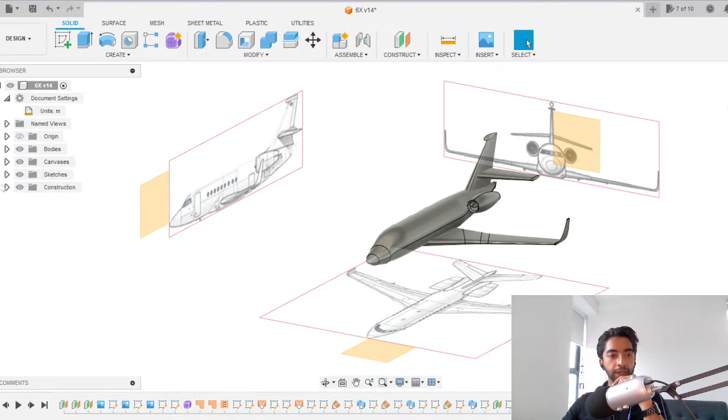So edit feature, you can go down. This one, edit feature, you can go to the back. And this one, edit feature, you can go to the side. So now you can see everything's quite separated, which is nice because you can see stuff clearer now, at least from the main body's perspective.

Okay, so I always tend to struggle with the wing box. For those who don't know, the wing box is basically this belly situation that connects the wing to the main fuselage. Every single time I come across this, I forget how I did it previously. I have a vague idea but I'm not sure if it's exactly what I did. I know what I'm about to do is going to work with some fine-tuning, but let's just go ahead and do it.

So what I need to do first is split the wing somewhere here, and then I'll create a connector. I'll separate the wing here, then create some sort of section at the plane of symmetry, and then I'm going to loft them. I think that's actually what I did last time as well, and I think the method works.

So I'm just going to split it maybe somewhere over here. Split body, splitting tool is going to be that plane we just created. We don't need this one anymore, so I'm going to remove it.

Now, in an ideal situation, and I highly recommend this, as you create the bodies you should start naming them, because otherwise it's going to get really confusing. At this stage it's okay because you can literally count how many bodies there are. But when you start adding complexity with different components and more detail, it's always a good idea to name your bodies, and even take it a step further to create components. When I do 3D printing related things, I usually turn everything into a component because I need specific things to be a certain way, certain colors, and so on.

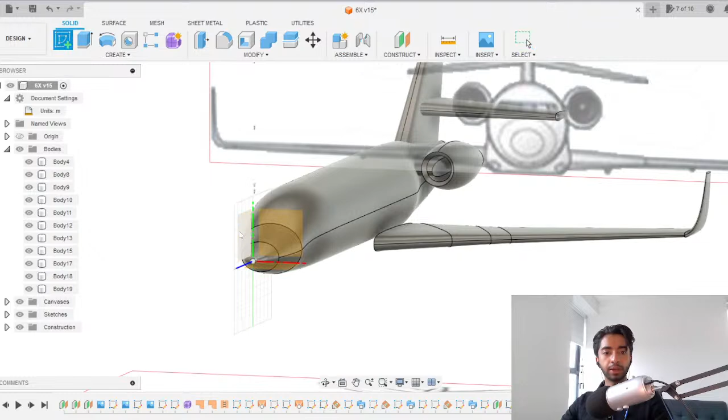But for now, I think we're okay. So construction, we don't need that plane anymore. I'm going to create a sketch at the plane of symmetry, disable 3D sketch for now, and I'm going to create a control point spline.

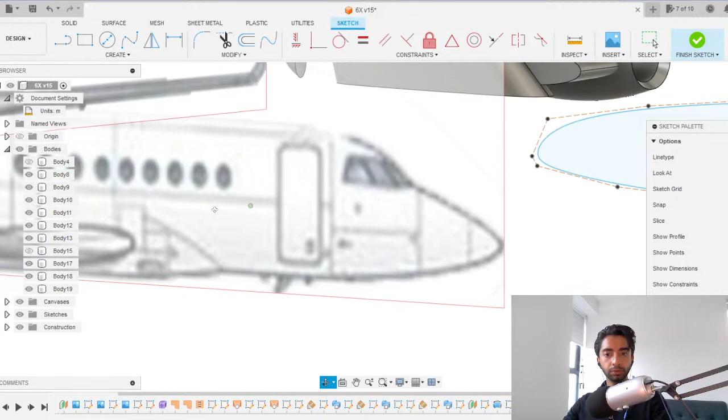Control point spline. And I want to go from here to somewhere here. And what I can do is activate tangent handle.

Excuse me, I'm really hungry. But we're going to finish this. We're going to finish this.

So let's roll with that for now. So we can edit the loft and add that as a guide rail. And then what we're going to do is just observe how that would have changed it. Selected rail does not touch all the profiles.

And surprise, surprise, I made the exact same mistake last time. The mistake here is that when we're dealing with control point splines, the control points aren't actually part of the surface that we're creating. There are external control points.

And ideally, actually, this should be horizontal. Ooh, that's not good.

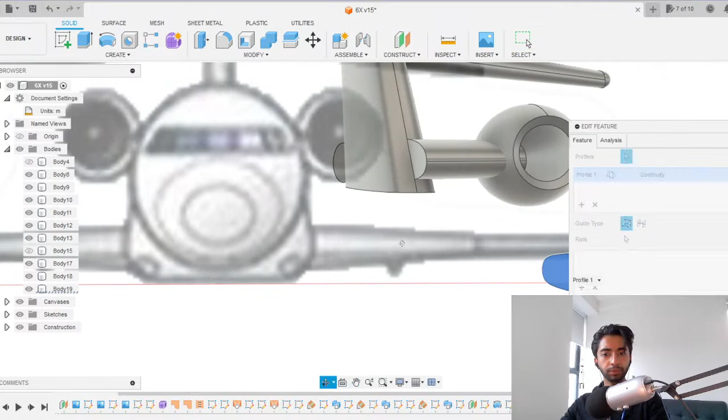Okay, finish the sketch. And now let's try and do loft again. Oops, where's that surface gone? Okay, yep, profile 1 and profile 2.

So that's interesting, I'm not sure why. Let's delete this loft, that's okay. Let's bring back that sketch. But for some reason, this is no longer a closed surface, and I'm not sure why.

So let's undo and come back to the point. Okay, there we go. So somewhere over here, we lost our thing.

So not entirely sure what happened here, but I think we fixed it. Let's see if we can still try and make this as horizontal as we can. No, and it's lost its thing again. I'm not sure why, but let's just undo and roll with it for now and see what happens.

So loft and our sketch, which is here. No, doesn't like that either. Okay, let's delete that. Let's delete that as well. Or we can undo to the point before we made that curve.

Okay, so now let's try again. Let's try and create a new 3D spline, and let's attach it between this point and that point there.

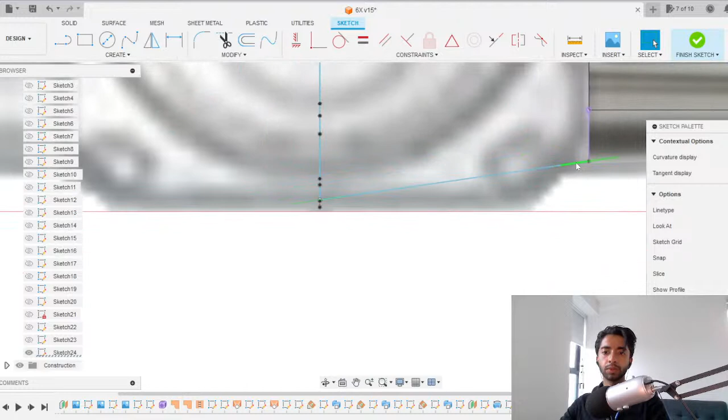Okay, and let's just check that that is still a surface. That is. Activate tangent handle. Move the point down. This might be too much. Press OK, and now let's see if we can roll with this.

So one step at a time. It's okay, this is why we do things one step at a time, so we identify problems. And let's add that as our rail. There we go, perfect. So we can see now that the entire thing has gone down to adjust to that spline that we created.

And in order to prevent the top part from doing what it's doing right now, we need to create an additional rail. In this case, we're going to do it from the top of this surface to the top of the other surface, again remembering to choose the one on the actual surface, to that one there. Excuse me.

So if I can do something like this, I think it would work. So again, loft, rail, add that as a rail.

And before we press OK, let's see how that actually looks. So it looks okay from that side, from the back as well, from the top. Let's see how it looks like from the top. You won't actually be able to tell anything from the top because the fuselage pretty much covers that area.

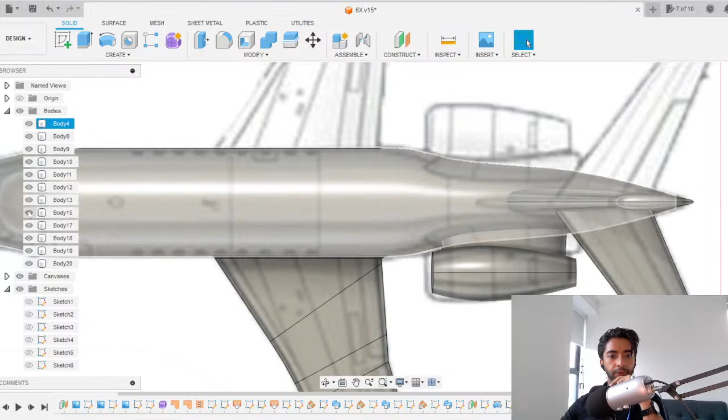So if we bring the fuselage back from here to here, you can see that actually doesn't look like much at all. But what we do know is hidden inside this is an absolute beauty. I quite like the way this ends up looking once the fuselage comes in place.

Okay, so let's save this. And now we have our wing box ready as well.

Cool, so let's try and see if there's anything else we've missed out in terms of main functional components. So we've got our fuselage, so now let's start naming this. We've got our fuselage underscore main. We've got our V tail, as I usually call it, which is the main. Then we've got our H tail, which is the main.

Then we've got our engine, which is also the main. The reason why I'm saying main is because when we start creating some subcomponents for this, there'll be things like V tail XYZ, H tail XYZ. Okay. Then this is going to be our engine_pylon. See, this is where it makes a difference. Then this is going to be our H tail tip. This is going to be our V tail tip.

This is going to be our fuselage nose. This is going to be our fuselage back. This is going to be our wing tip. This is going to be our wing main. And this is going to be wing_box. Of course, the wing box could either be part of your fuselage or it could be part of your wing. In fact, this should actually be fuselage box for me.

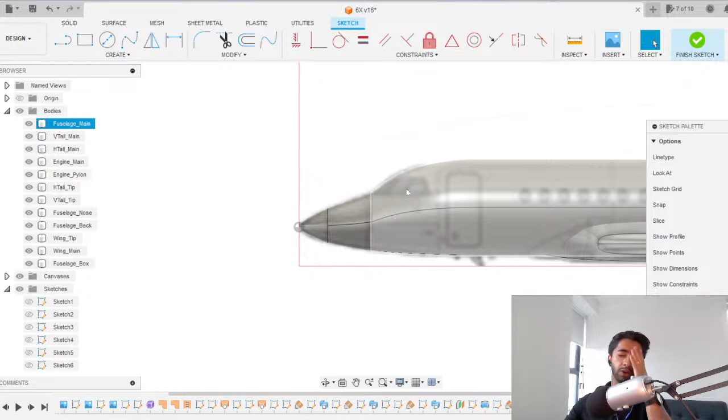So let's do that. I'm gonna create a sketch in this scale, and I'm just gonna keep an eye out on how the cockpit looks. So the cockpit's really nice. It doesn't look too aggressive like some of the Boeing ones do. Okay, so it seems like this is sort of a downward, that may be a straight line, that may be a straight line, and that's also going downwards. Okay, so nothing too complex happening there, but again, this is where a good quality blueprint would make such a massive difference. Right now, there's not much that I can tell from this.

What I'll have to do is rely on constantly looking at these blueprints, these reference images. So that might be a close one to look at. And what I'll do is I'll put this on my other monitor so I can look at it continuously. Where has it gone? Okay. So it appears to be doing something like, okay, we need to switch off the 3D sketch so it doesn't mess up anything. It appears to be doing something along the lines of this goes backwards, goes down a little bit, and then comes back up. Let's try and do that.

And obviously they're not sharp, they're all curved. So maybe something like that is nice. The next bit seems to be relatively flat. So when I say flat, they're quite horizontal to each other. But the real question is, how many windows does it actually have? So is that 1, 2, oh, and then there's a middle section as well. That's where these things can get really deceiving. No, it doesn't. It's got 4 cockpit windows, but it looks like from here that that's not the case. Okay, well, we're going to follow the reference pictures in this case because there's more reference pictures than there are blueprints for this particular aircraft.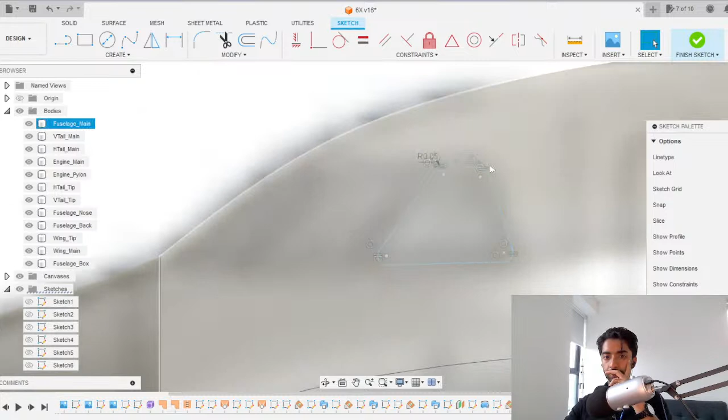So what I'll do is I will probably not make this from this view, and I will carry on from this view. Okay, let's try that out, shall we? So this should actually be going down a little bit more. Yeah, that's what I meant to do. It should be going down a bit more, rounded. Okay, let's do that. Modify, split face, and that's the face we want to split. There we go.

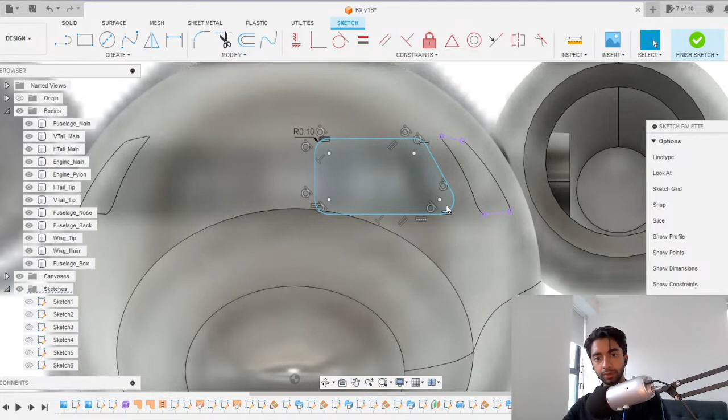Okay, so let's try that. And I feel like we might run into an issue because of this and this. But before we do that, let's try it out anyways. Okay, but this one should be a different radius. So might do that and that, but give this one a different radius. Did that even work? Yep.

So what I think is we can actually pull this bit down a little bit. Edit form. And it's this particular one that's bothering us. So what I'll do is I'll push this to the front a little bit. Bring it down. Finish form. And that allows us now for this sketch to be completely part of that surface rather than also being included in this one. So it was a very minor adjustment, but it'll make our lives a lot easier.

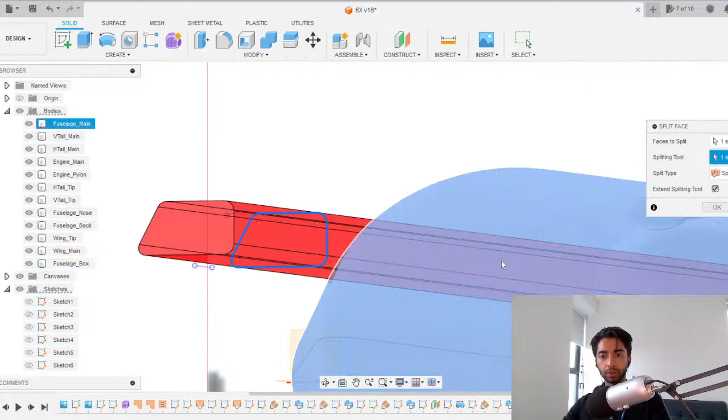So modify, split face, and this is the one we want, and splitting tool is this one. Oh, okay, fair enough. It's still done the same thing. Compute failed. And I think in this case, it's because of the back. So split face with that. And yes, as you can see, this is now going to cause us an issue from the back side. So what we can do is to split the fuselage, pseudo split the fuselage, and then we can join it back up.

So the way we can do that is we can create a construction plane from here, maybe till here. And we can use split body to do that. And now let's do split face to this one. And there we go. Okay. So that's good. It's finally helped us. But we can see that if we compare this to this, that doesn't look the most accurate in terms of this section here.

So what I'll do is I'll try and edit the sketch a little bit. Bring it back a little bit more. Finish the sketch and see what happens. Okay, that looks more like it. But we can still see this curvature here. And I am not exactly sure why. So from this view, it looks good. But from this view, you can tell that there's a bit of curvature. I mean, the real reason is because of the actual fuselage's curvature. Things that look straight in one dimension will probably not be straight in another dimension.

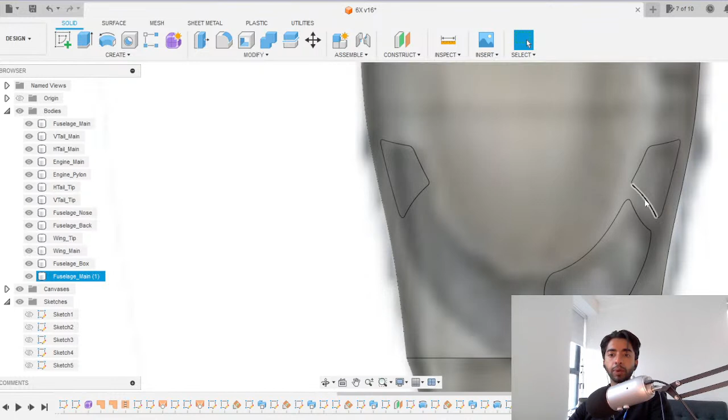So ideally what would have happened is we made all the cockpit glasses from one single view. So for example, if we made it from here, that would have probably been a better idea. But I don't know, it's not usually worked out for me. But you never know. Let's try it out. So let's go back in time. Might be an interesting challenge to face. And what we'll do is we'll try and do it from the top view. So from the top view, thing is we don't really know what the exact shape would look like. So let's skip this bit. I think that would overcomplicate things too much. Okay, so let's do that.

Let's go back into the sketch and mirror this. So let's mirror these elements. And the mirror line is the plane of symmetry, of course. So the origin, that's our line. Press OK. There we go. Press finish sketch. And now let's modify, split face. That one, splitting tool is that one. There we go.

Now we have a cockpit section as well. Now, what would be really cool, purely for an aesthetic purpose, is to add those lines there as well. And I guarantee you it looks so much better already. But because this is going to be 3D printed, what I'm actually going to end up doing is embossing these, and I'll show you very quickly how I intend on doing that. It's press pull here, and then you just go minus, let's say 0.5. Okay, I'm not going to go down that deep, but you can see that this is something that you can do if you wanted to add depth to a sort of flat object.

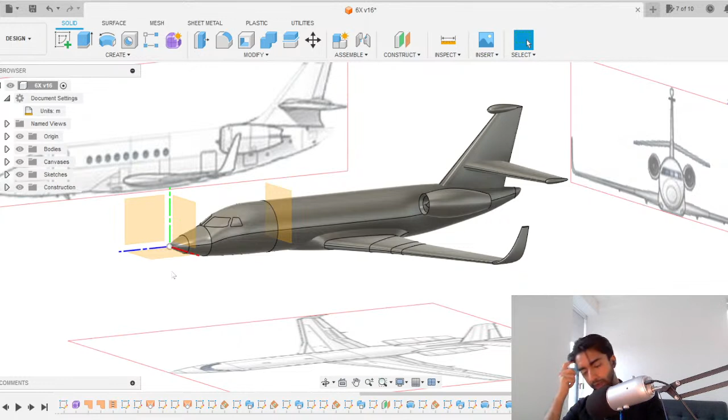So let's leave that where it is. Let's hide this sketch now. And of course, the reason why I'm not embossing right now is because we're going to scale the entire model down to a fraction of its size because we want to 3D print it, and then we're going to emboss it. So let's hide the origin.

We don't need this construction plane anymore. And let's try actually combining this back into its body. There we go. It worked. So that's nice. We have somewhat of these temporary go-arounds that we can use from time to time.

Okay, let's create the door. So the door should be pretty simple. So we'll just make a square. Oh, sorry, a rectangle. And we'll add a fillet to it. There we go. Finish sketch. Modify, split face. Splitting tool is this one. There we go, done. Let's add another sketch.

And now we're going to work on the windows. Thankfully, there aren't many windows in this aircraft. There's 1, 2, 3, 4, 5, 6, 7, 8, 9 times 2, 18. And the reason why I say thank God is because if you were here on the previous live, you would have noticed that there were approximately 150 to 200 windows.

And the problem with that is that when we are splitting faces with these windows, there's so many splines involved that Fusion itself is inefficient with splines. On top of that, I am recording the screen, and I'm streaming it live. So that requires a lot of computation power, and therefore it was being extremely slow. But hopefully that's not going to happen in this case.

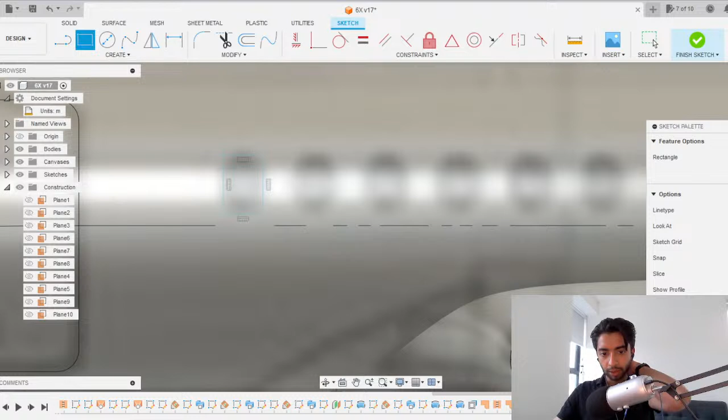So let's create a window. And in this case, you can see, where did that go? That's the 6X. That the windows are quite round. So if we look at this one, the windows are quite round. So they're not like the usual airline windows that we might be familiar with. They're more oval, but these ones seem quite round.

Now what this would have done is it would have split the face on the left side, but also on the right side because it's part of the same surface. Same with the door, as you can see. Okay, just making sure everyone's okay.

Cool. Now we want to create a rectangular pattern with the feature, which was the split feature. The axis is this one, and we need 9 quantity. And the last bit is going to be .75. Actually, before I do that, let me save, because we might get into trouble. Rectangular features, split face, axis, and there were 9 that we needed.

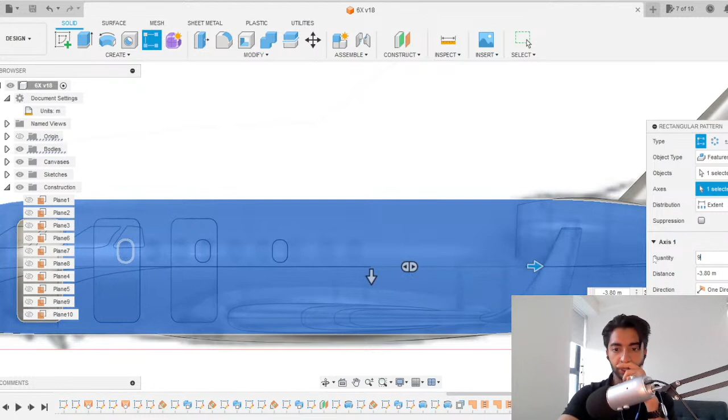If we really wanted, one additional thing we could do is add that 6X. But because we're going to 3D print this, none of the livery and the colors are going to show, unfortunately, because I'm printing in a single material. What I think we should do is scale it down, emboss it, and then call it a day.

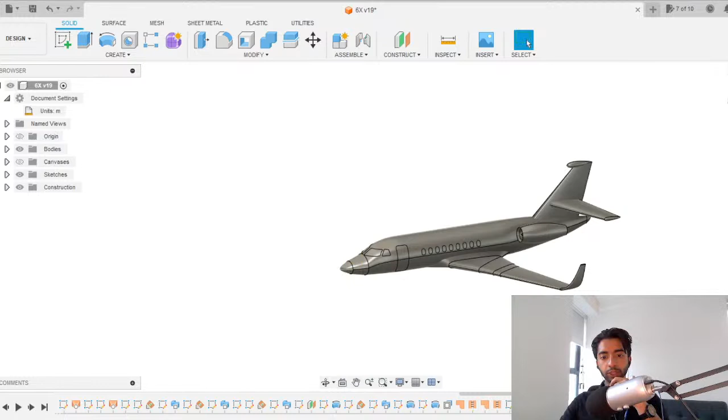The reason why I'm using the origin as the point of scaling is because when we scale it, we're hoping that the plane of symmetry still remains. So I don't know how much I want to scale it by now, but let's do some quick calculations. Currently, the length of this aircraft, let's do a quick length check, is around 26.642 meters.

The scale I want this in is about this big. And that is approximately 15 centimeters, if I'm not wrong, which is about the length of a ruler, really. A standard ruler would be 15 centimeters. So if you can see that ruler, this is how big I'd want it. So let's say 14 is our target. So 14 centimeters is our target.

So the first thing we need to do, I feel like I'm teaching primary school maths at this point, but you know what? We get this wrong all the time. So what I'm going to do is I'm first going to convert 26.642 into millimeters. So let me do that.

26.642 meters equals to millimeters. And that, my dear friends, is 26,642 millimeters. All right. And at the same time, I'd like to convert 14 centimeters into millimeters, which is pretty standard, 140 millimeters. And the reason why I'm actually using Google to do this is because you don't realize, but you miss a decimal point and everything gets blown out of proportion. So just to be ultra safe, I like to do it this way.

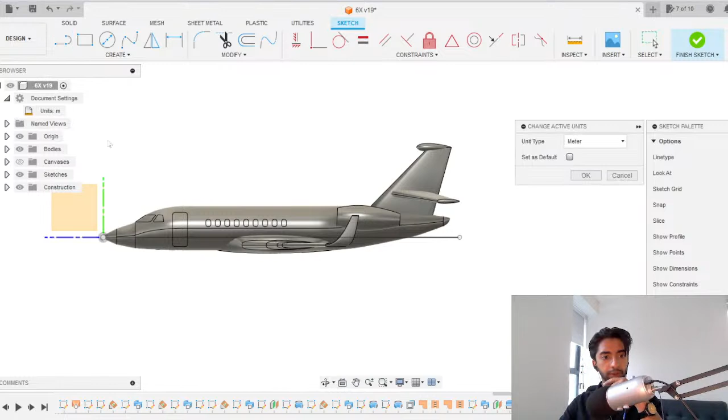Let's create a new sketch here, and this is now 0.13 meters, which is still not correct, I think. So let's now convert this to millimeters and do an inspect. And this is 133 millimeters. Actually, that's correct. That's correct. So it's close enough to what we wanted. We can increase the size of this just a little bit if we want. So let's finish the sketch. And now we can scale this up a little bit.

So origin off, sketch is off. Origin point. And we can scale this up by, let's say, 1.1, and see if it's closer to what we wanted. Okay, 146 millimeters. That's perfect. And just to confirm, 146. So 146 millimeters is equal to centimeters, and Google says that is, why is it doing that? Millimeter to centimeter, 14.6, correct. So let's leave it at that, and I think I'm pretty happy with this.

And now all that is remaining is to actually emboss this. So we don't need the sketches anymore. We can switch the origin off, finish the sketch, press pull, and we can do 1, 2, 3, 4, 5, 6, 7, 8, 9, and the door as well. Let's do the door separately, actually. Then we have 1, 2, 3, 4, 5, 6, 7, 8, 9. I'm going to push this in by 4.

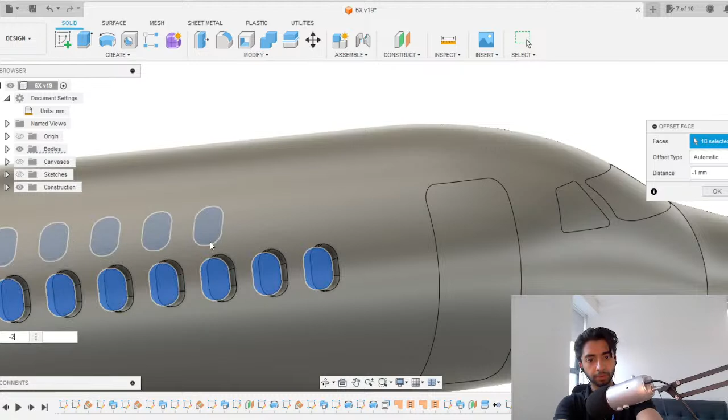That's too much. 4 is too much. So let's do -3 and see what happens. Too much as well. -2. Too much. -1. Okay, -1 seems like a good idea. Okay, wonderful. Save that. So I think we settled for, what was it? -1, right? Yeah. So we can do the same thing for our doors. So do -1. And the same thing for our cockpit as well. So 1, 2, 3, and 4, -1.

Okay, that's looking super cool. And final thing is to just mirror this. So create mirror bodies, that, and that as well. And there we go. Let's create that in your body. And perspective. So, ladies and gentlemen, oh, oops, that was a flop. We need to mirror one more thing, and that is that one as well. Okay, there we go. Now I can say that again. So, ladies and gentlemen, that is our aircraft complete.

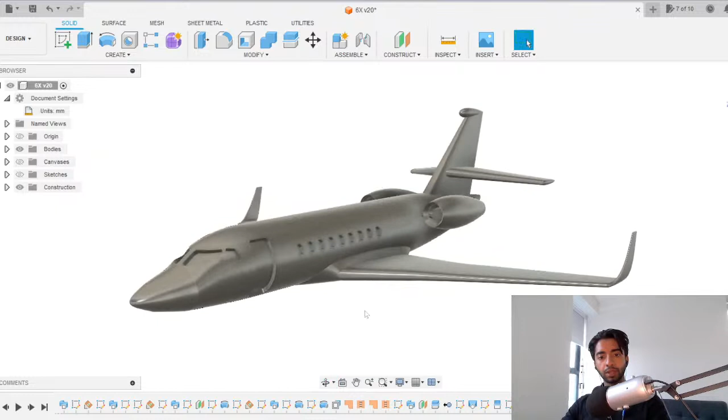Yeah, so there are some additional things that I need to do in order to make this 3D printable. But I will do that in my own time.